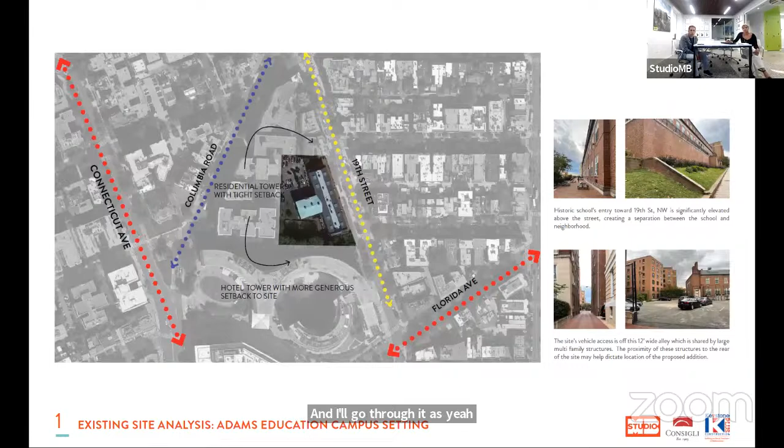Let me start on this part, and then Markeisha and I'll go through it. As I mentioned in our last conversation, you're all well aware of how dense the neighborhood is at the Adams campus. It is a very small, very dense urban site.

It's bounded mainly by the triangle defined by 19th Street, Columbia Road, and the Hilton to the south. Our site fronts 19th Street and butts up against the Wyoming on the backside of the alley. There's a very thin alley access between those two buildings that's on paper a 12-foot alley, but in fact only 11 feet, because there's a light pole actually installed in the paving there.

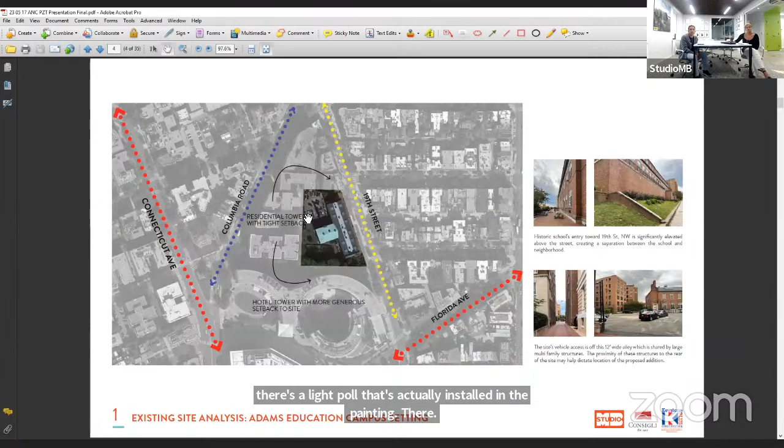So it's an 11-foot alley to get to the rear of the school, and there are some interesting topographic challenges we'll talk about. There's a lot of traffic on Florida Avenue and Connecticut Avenue, a lot of traffic on Columbia Road, and 19th Street certainly sees peaks throughout the day. We're doing a traffic study that'll be part of the team's effort going forward—they're actually out there counting cars next week.

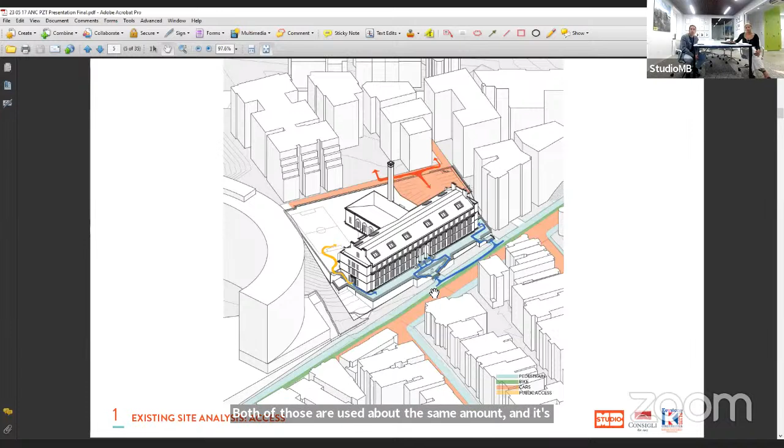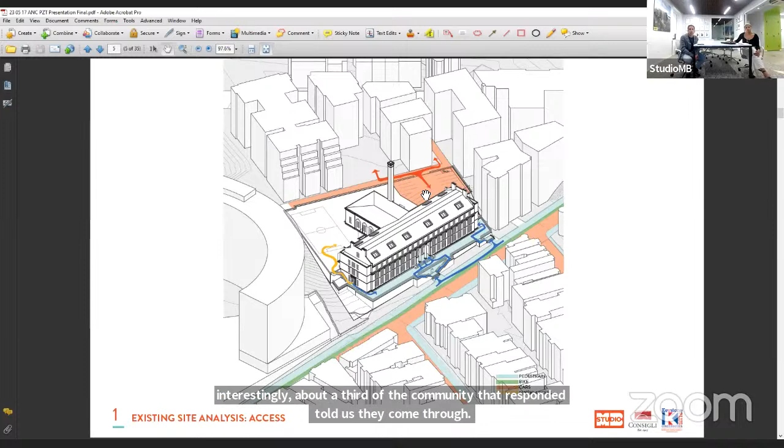This is a slide we've developed showing access to the site. One thing we learned from the school improvement feedback sessions was that the two front steps, which are part of the accessibility issue we'll be grappling with, are used about the same amount—about a third each by the community coming and going from the school. Interestingly, about a third of the community that responded told us they come through the alley, where that red arrow is. That alley, as mentioned, is quite narrow, and is also used for access to parking for the apartment buildings back there.

Our neighbors to the north and west abut us on that alley—on the west, and then right up against our property on the north. Then there's the yellow arrow showing access to the soccer field and playgrounds used by the neighborhood during the hours the fences are open there. So that's the public access to the rear of the site currently.

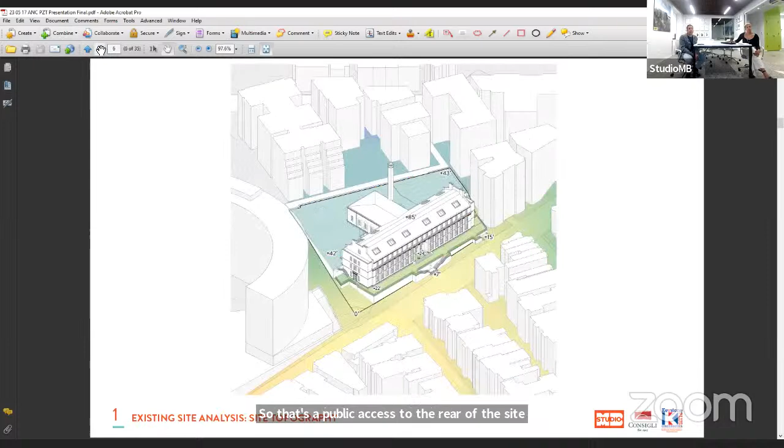This is a very interesting slide I like to point out—this is basically an 8-story building. If you take the corner of our lot at its lowest point, at zero, and go to that back alley, that's a 43-foot elevation change. The building itself, from our low point of the site to the terrace in front of it, is about a 22-foot wall at that corner, rising up to about a 7-foot wall at the north corner of the line. And the building itself is 85 feet above our low spot.

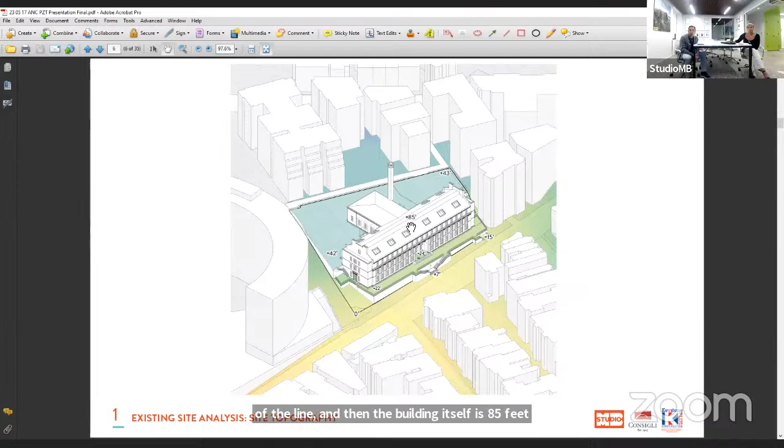So we are dealing with a very vertical condition, of which the school is not proposing to go any taller. The Historic Preservation Office would love for us to keep our addition below the ridge of the 85 feet. We think that's important to do as well, and all of our schemes have considered that.

This is a slide showing the adjacent heights. As I mentioned, our school is about a 4-story building in terms of occupancy above that terrace, but in height it's about 8 stories from the street. We're surrounded by some very tall buildings, and then the single family and row house neighborhood of 3- and 4-story structures in the Kalorama district to the right of us on the map, on the east side of 19th Street.

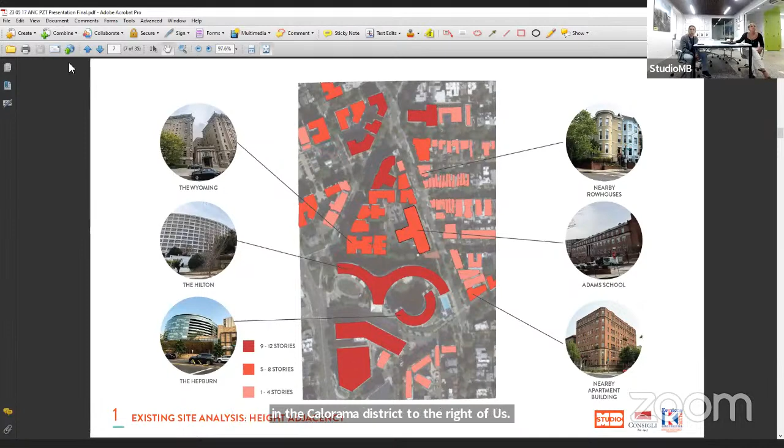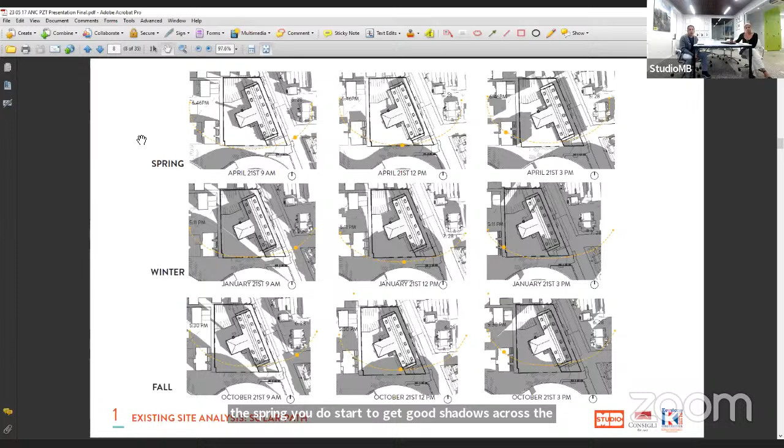Just a couple of things about what we've learned about the site. We have the veranda, which is 22 feet tall at its tallest corner, and in front of that are 4 donor trees, 2 of which are full grown and 2 are actually quite small, because urban forestry let us know that they had actually taken out 2 trees at one point, and then were contacted by the young woman's father, who reached out to let them know that these donor trees were done in her name, and so they've replanted 2 donor trees. So there are 2 young donor trees and 2 mature cherry trees there that we're trying to avoid.

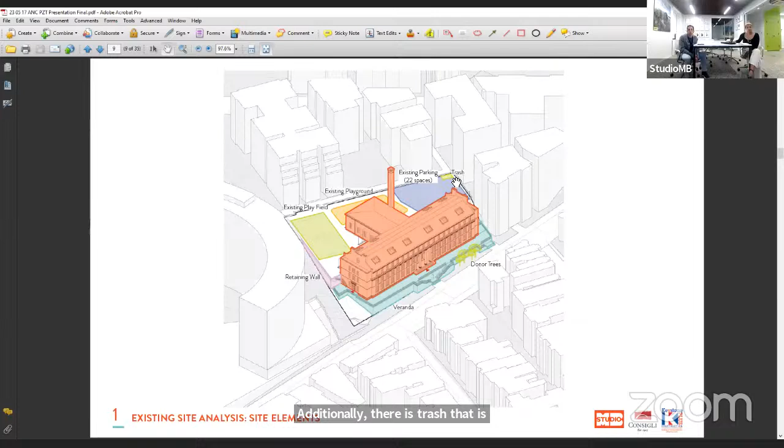Additionally, there is trash that is accessed off of the alley. The site doesn't currently have loading and unloading berth as required by zoning, but there is a trash area there, and an existing parking lot, which is striped for 22 spaces. And then the existing playground and playfield, which I'll show in a different view, are publicly accessible.

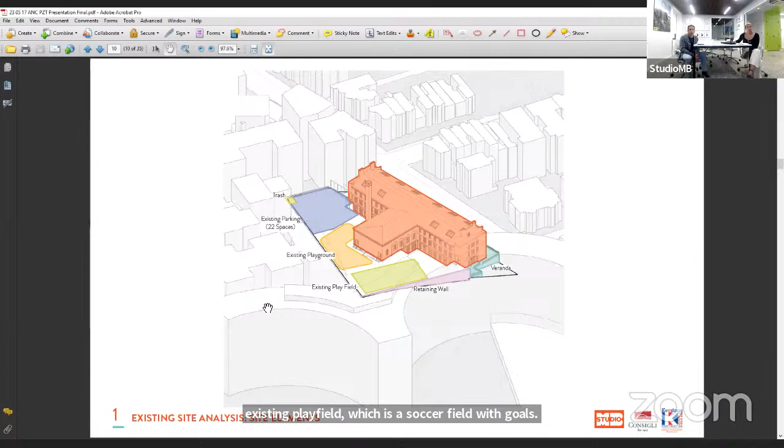And then from the rear, you can kind of see this same slide. The existing playfield, which is a fenced turf soccer field with goals, the existing play yards, which include a basketball hoop and some climbing equipment, and then the existing parking lot and small trash area that is off of that alley.

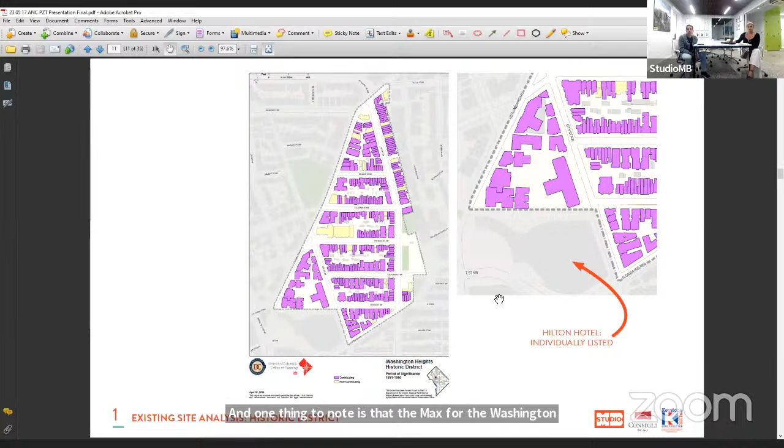And then finally, again, we are a contributing structure within the Washington Heights Historic District. That means we are looking for your support to treat this historic property with as much sensitivity as we think it deserves. One thing to note is that the maps for the Washington Heights Historic District do not include the Hilton, but that is in fact individually listed and does fall within the boundaries. So we are surrounded on all sides by contributing structures, and in fact are contributing ourselves.

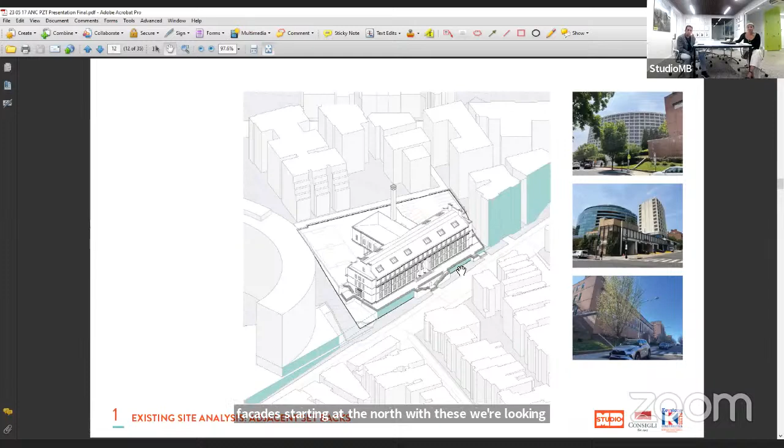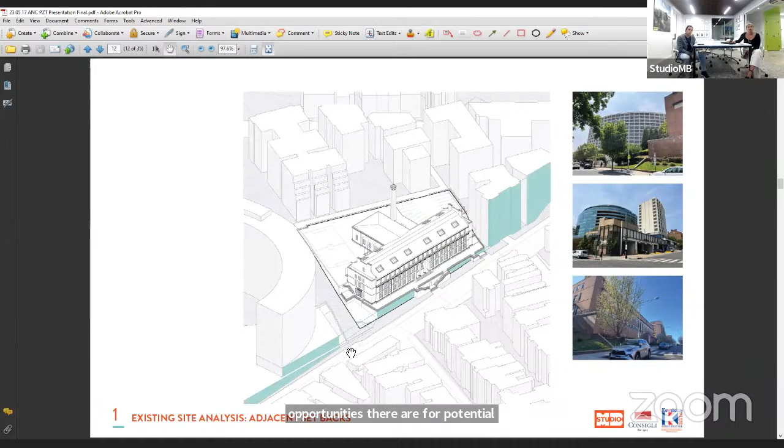It's worth noting that that wall, which is our property line, is punctured by those stairs that Dave was mentioning earlier. And then that wall continues, seemingly to align with, at least how you would perceive it, the plinth of the Washington Hilton. What you can see here, hopefully, are dashed lines that start to talk about gaps within that horizontal and vertical plane that happens along 19th Street. So here we were just starting to analyze what opportunities there are for potential addition within this context of this very strong plane along 19th Street.

And then our primary facade is set back from our veranda wall by about 20 feet. It's interesting to see what that creates. We start to think about the bookends that are created, right? So we have our facades pushed back, we have our veranda, and these tall buildings then turn towards us, creating these bookends that we're starting to think about how we should respond to, and what that space really feels like when you're standing on this veranda.

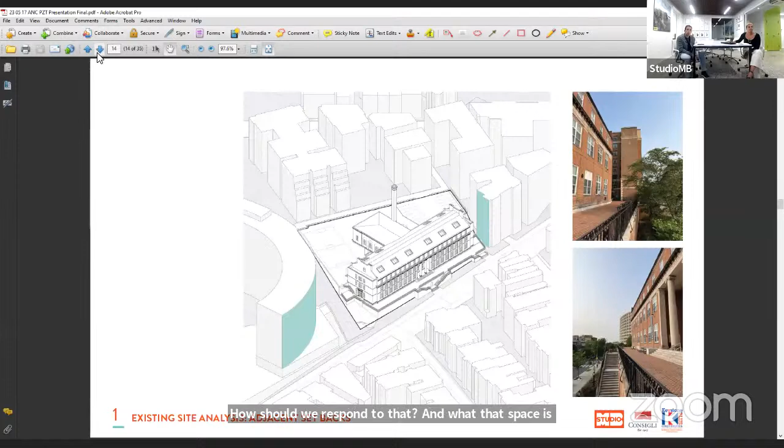The other thing that's really strong and worthwhile to explore is the horizontal plane created from that veranda, and how that aligns with the plinth of the Hilton. It starts to make us scratch our heads and think about what happens in this trapezoidal zone that we currently have, which is sloping up.

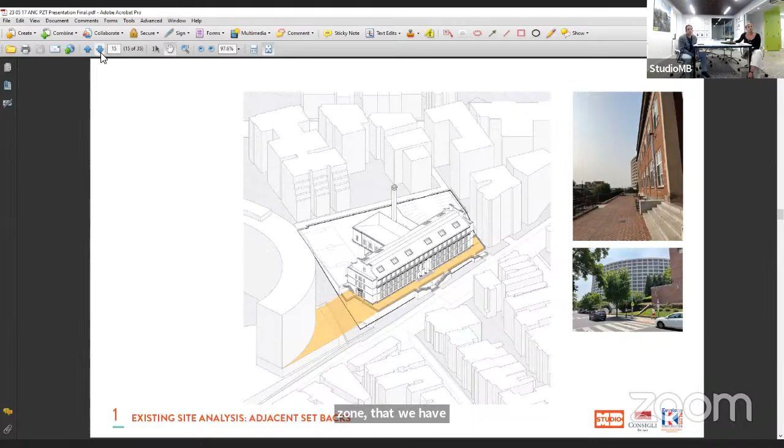And then we pull all those together to really hit home on the monumental scale of our school, as well as how we're framed by the Washington Hilton and the multifamily projects to the north, and what our response would be vertically as well as in the horizontality of the veranda. Again, really honing in on what's happening in this gap between the horizontal and the vertical continuation.

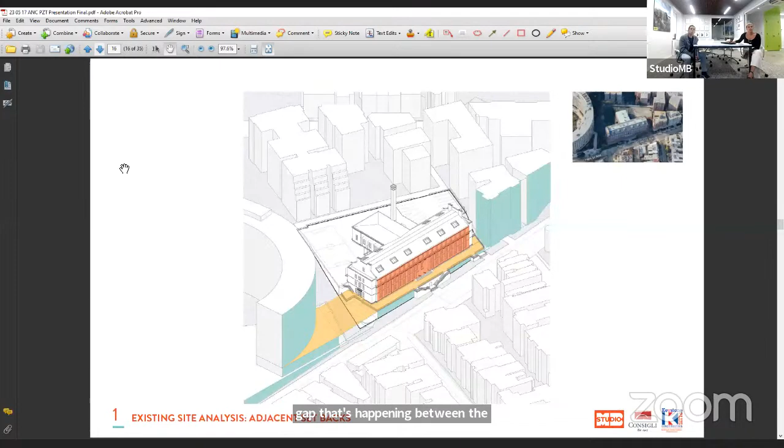So just a couple of context photos. It's important to note some of the conversations we've been having in our dialogue with the Commission of Fine Arts staff and the Historic Preservation Office. Obviously, this is a very majestic building that sits back from the street, which they are very sensitive to. I will tell you it is in very intact condition on the inside, and very much so on the outside.

We do not want to modify that facade. We want to clean it up, repoint it, and make it beautiful and look new again, but we aren't proposing anything significant on the facade towards the street.

They are very keen on the view that you see in the big image to the right, the view up as you're walking up 19th Street. We've shown that to them, and they agree with us that the plane of the veranda, the plane of the front property line, and the plane of the wall behind the veranda are things for us to play off of, which I'll show you here in just a few moments.

Of course, at the rear of the site, we're going to talk about the parking. We're going to talk about the community's concern on the ability to have outdoor play space, which you see in the top right and top middle, and we'll get to that in just a second.

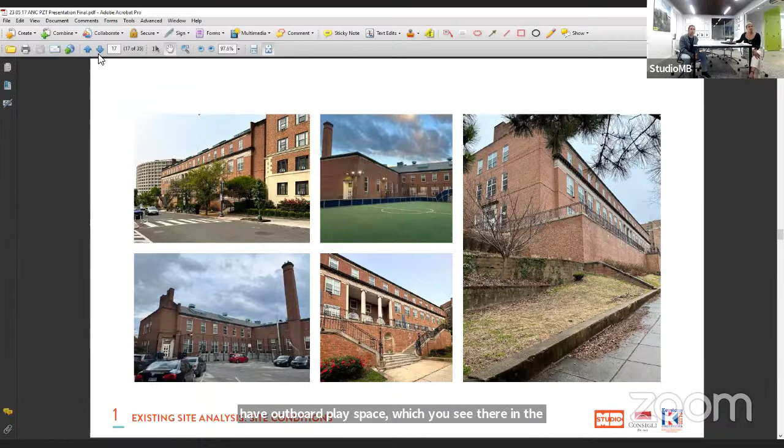This is a photo of 19th Street, the west side, particularly the loading that happens when the street widens by the Hilton. There are, I think, 6 different loading capacity pieces along that facade of the Hilton. There's a lot of trucks backing up and into that portion of the site. And then, of course, the 8-story buildings to the north of us that you see there, with some blank walls and a stair from the Hilton on the bottom right.

This is on the opposite side of the street from us. There's some weird thing happening with our feed there—I hope you can hear us. This is across the street.

These are the Kalorama, kind of lower-scale buildings directly across the street from the school—predominantly 4-story structures. There's this magnificent one which used to be the Chinese Embassy, the top right photo you see there, with interesting bays and two-tone limestone and brick components. Then you get to the 4-story apartment buildings that folks are familiar with there.

And then, of course, once you turn down the 2 side streets, the scale starts to change. There are row houses, 3- and 4-story, and a few pristine mansions, like you see on the bottom left, that have been converted.

And then lastly, along Florida Avenue and Columbia Road, these are very busy roads with very high buildings that define the kind of triangle within which we're set.

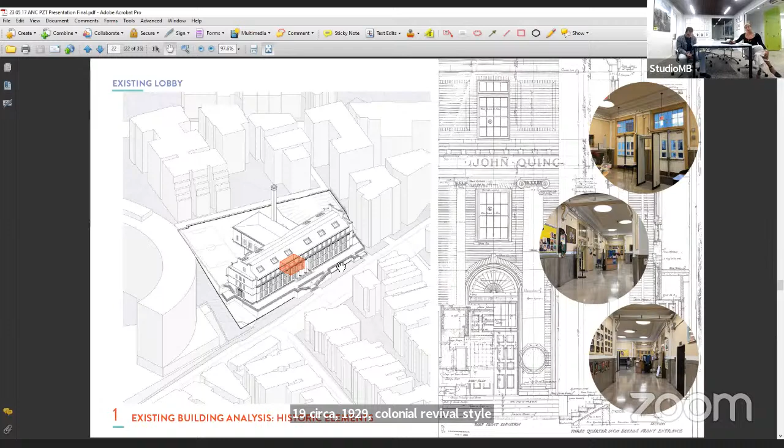So here, you've heard us talk about this circa 1929 colonial revival style building and how it is in really good shape, actually. And so we have engaged with HPO and CFA early to talk about which spaces on the interiors we should be mindful of, careful of, and restore, all within the scope of trying to deliver a modernized educational facility.

Starting with the first area we've identified as precious and to be preserved is the lobby. In the pictures here, you can see there's quite a bit of existing molding, and there's wainscoting along the walls. We'll be working closely with our partners at Consigli and DGS, as well as our historic consultant and CFA and HPO.

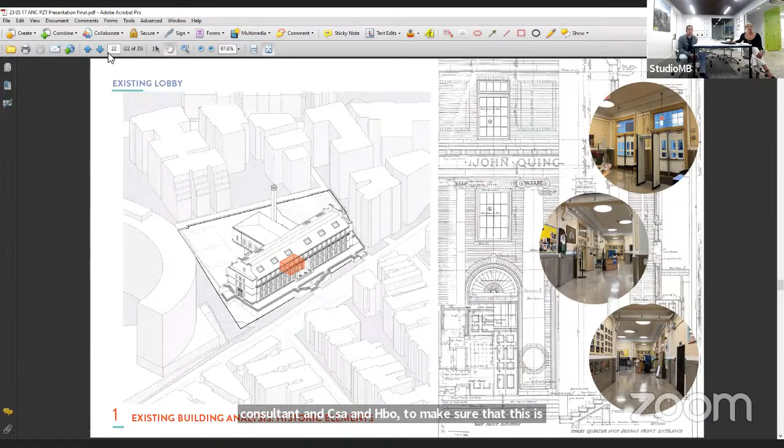There's the corridors. The corridors have terrazzo flooring, as well as these intermediate partitions that have the transom and side lights, which we'll also be preserving. We'll be working on the final doors, but in terms of this portal that leads you along this way, we'll be working on maintaining that. There are some elements you may be familiar with - the wall tile will probably be removed, but the priority would be to maintain the terrazzo floor and these original partitions.

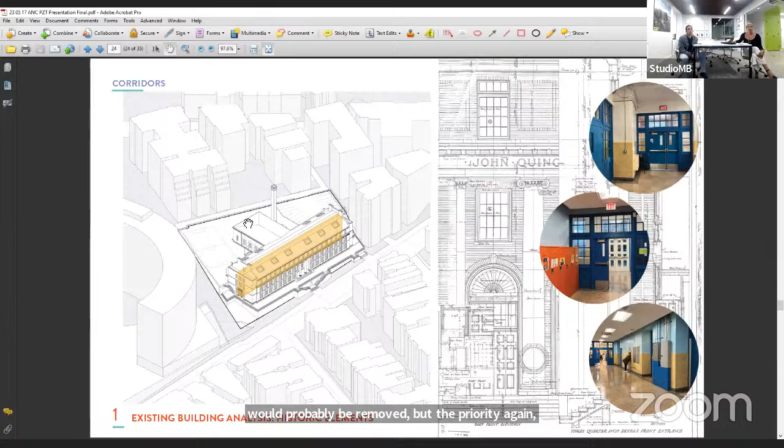And then lastly, there are some covered skylights that originally served as lay lights. These skylights provided light to level 3, which I think is quite awesome. We already have a generous amount of natural light, but in addition, they had these really cool skylights. We've identified these as opportunities for restoration, and in particular we're trying to preserve and restore two of these skylights to their original function as lay lights, as a sort of exhibit for the students to actually experience natural light coming in on the 3rd floor.

Here's a picture of it within the classroom. And then of course, sadly, that is covered with paper when you go up into the attic. But that'd be a priority of ours as we modernize the project. And those were identified on our site walk with the Historic Preservation Office.

This is a very important structure to them, and it's unlike some of the other schools we've worked on in the district. They feel very strongly about the preservation of this one, and quite frankly we've worked on schools where we might have disagreed about that interpretation, but this is really a magnificent structure, and their interests align with ours, and I think the school community's interested too. Adams Morgan is named after the Adams School - it's a really important feature of the neighborhood. It's a beautiful structure, we want to preserve that, and we are in alignment with Historic Preservation Office, and I think CFA's staff agrees it's a magnificent structure.

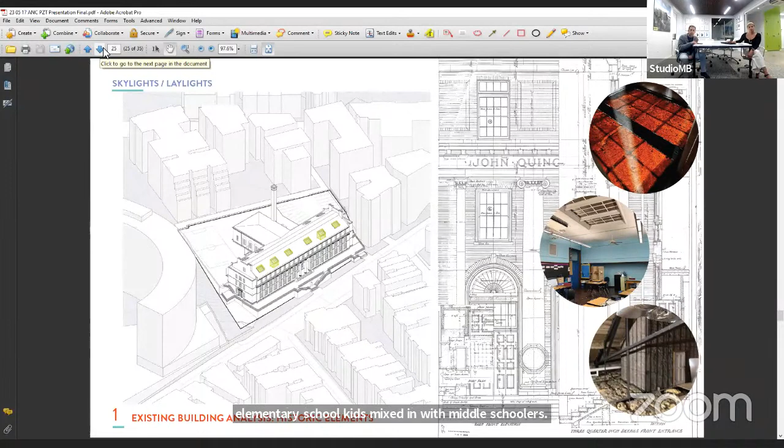So how do we think about adding pieces to this to get a modernized school that'll give the students here, who range from 4th through 8th grade... it's important to understand these are elementary school kids mixed in with middle schoolers. If you have kids - and I've had kids that were 6th grade daughters mixing with 8th grade boys - that's something I was sensitive to. In this campus, you've got 4th and 5th graders mixing with 6th, 7th, and 8th graders. So it's a challenge to have those all operationally together, and to try to do that with a modernized school in this footprint is what we're going to talk about next.

So let's go to the next slide. We've kind of defined what are some of the major exterior considerations that we have to take into account.

First of all, there's no getting around the density of this urban site and how little space exists on this lot, and how wonderful the community absorbs all of this. When you walk by this school, which we do often since our office is only 4 blocks south, there are kids on the terrace and you know it's a school if you pay attention walking by. They're elevated, but you hear laughter throughout the day and playfulness after school, kids stretching from the running club or basketball team because the gym is so small, stuffed into that auditorium. It is a dense urban site.

We have a lot of things we want to accomplish on this site, and the priority is to provide an equitable set of facilities, indoor and out, compared to what the rest of the district students are getting. That's the challenge of the dense urban site. The other thing we've pointed out to the Historic Preservation Office is there is no equitable, accessible entry. We can't just have the accessible entry come through the basement because then it's not equitable. We need to create an entry accessible off of 19th Street that allows equitable access to students who may not be able to do the stairs, and parents as well.

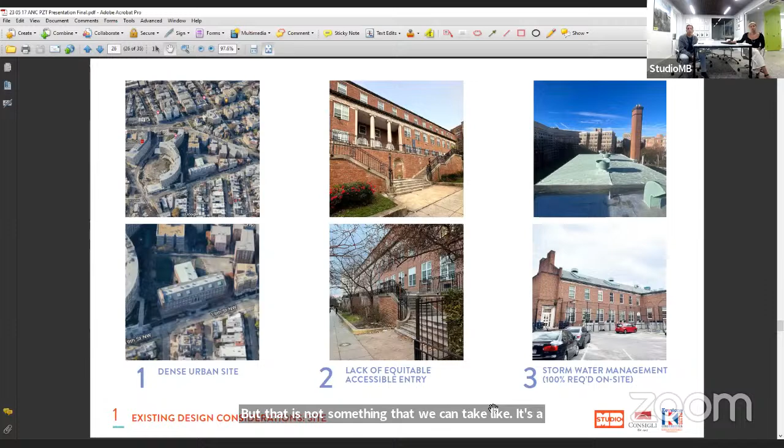Finally, there's a significant requirement from DOE to treat 100% of the stormwater on site with green roofs and other things, contributing to our pursuit of LEED for Schools on this project. But that's not something we can take lightly - it's a very dense urban site that we have to retain stormwater on. So that means we're going to have green roofs on the new portions, and we'll need rain gardens throughout the site to pick up runoff.

Next slide. Then when you get to the interior of the school, how do we take this large building and use the footprint of what we have to maximize the square footage that isn't being used? What you're seeing in these images is Markeisha walking through the attic, under the 85-foot mark. If you walk in at 0, she's 85 feet up - well, she's 70 feet in the air, it's 85 to the ridge. So she's up in the attic. There's opportunity there, we all agree, to open up the rear to get classrooms into this space with plenty of height.

There's likewise under the veranda - very dark, but excavated space - that the Historic Preservation Office would like us to utilize to whatever degree we're able. However, they do not want us to penetrate that wall with windows. And then there's a large mechanical room that we're putting some classrooms into, particularly music classrooms, to take advantage of the height. And then there's using any kind of shaft space along the corridor walls that we can to enlarge the classrooms to modern standards. These classrooms are almost big enough for current classrooms, so we're able to use them as currently laid out in a lot of places if we take away the shaft space behind those walls.

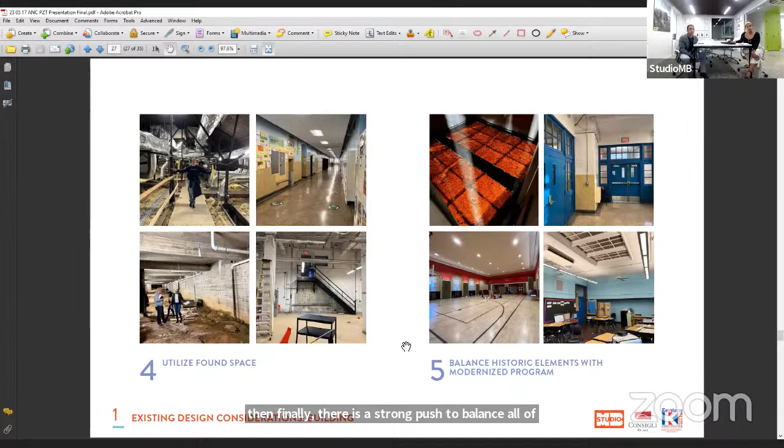And finally, there's a strong push to balance all of these historic elements inside and outside with a modernized program of education specifications. Next - so the design concept. Let me walk you through some of the steps, and then I'll show the site plan so we can talk and pause there for questions. I know those are already coming, but let me go through the design concept, which is 4 or 5 slides here. Can you click forward?

So you're 70 feet above the entry. This is a very vertical building, and that is a very vertical school. I don't think anybody would design a 7-story school if they didn't have to, and so we kind of have to.

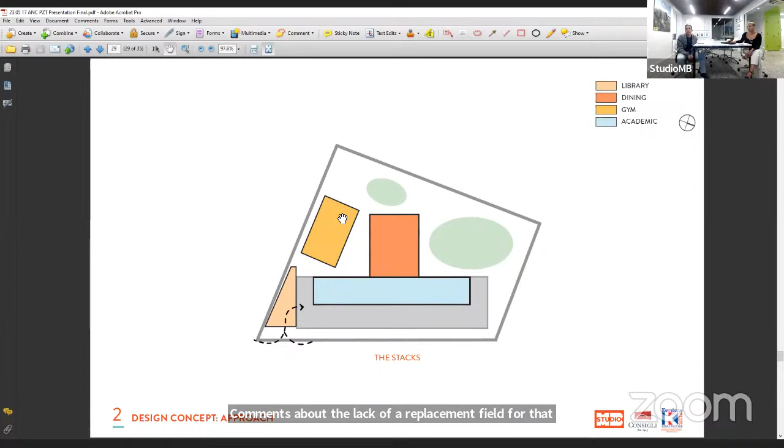So we have a 7-story building here, and part of that is a modernized program that includes a gym. The gym is tucked into the corner of the site, located where that existing soccer field is. We've gotten a lot of feedback from the SIT, with very concerned comments about the lack of a replacement field. Whether that soccer field were to stay there or we put the gym somewhere else on the site, there is a loss of footprint in order to accommodate this modernized program.

We call this the stacks, because with that entry you see on the left, we're trying to put as much program over there so that the addition doesn't grow. We've talked with the school about whether the library wants to be up in the attic or in a more equitable position in the addition on the left.

The librarian was very adamant that he did not want the library to be an afterthought in the attic. He liked the current library, which is only 900 square feet, and the new library will be 3,600 square feet, to give you a sense of the difference between what they have and what we're offering. He wanted it to be very close to the entry.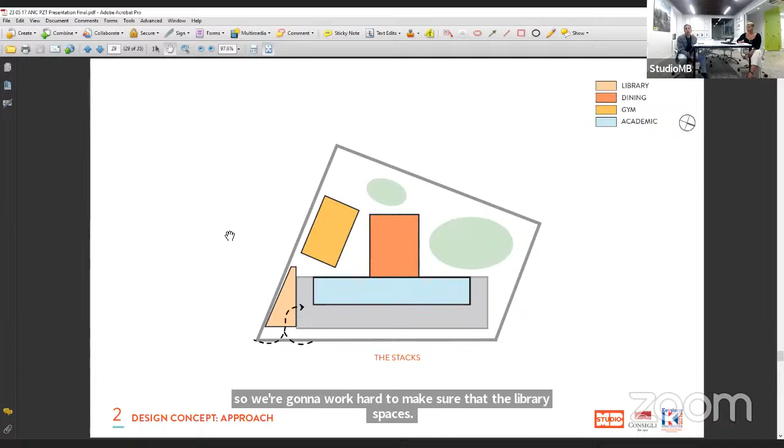We're going to work hard to make sure the library spaces, as has been done elsewhere in DCPS, work with the flow of students that come through there. That's something that will continue to be developed, but the school has chosen the library to be in this portion of the site.

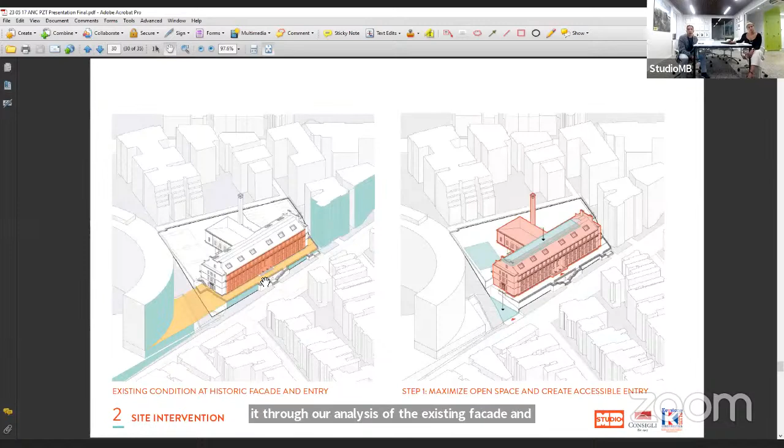Next. So very quickly, Markeisha walked you through our analysis of the existing facade and entry veranda you see on the left. I've talked about where we're locating our addition spaces, because we're trying to maximize open space on the rear of the site. We need to provide an equitable, accessible entry at the lowest point of this.

So we're proposing, in that trapezoid shape Markeisha referred to, an entry pavilion, and then a piece above that containing the library. On the roof of the existing building, we're maximizing the rear of the attic and putting classrooms facing out the back. Under those skylights Markeisha mentioned, we're putting rooms that will be lit through those reopened skylights—two of those will remain as lay lights down to the 3rd floor classrooms.

We're taking advantage of that. And then of course the gym, in its scale and location, is starting to relate to the scale and size of the auditorium, which is the cafeteria-auditorium in our proposed renovation.

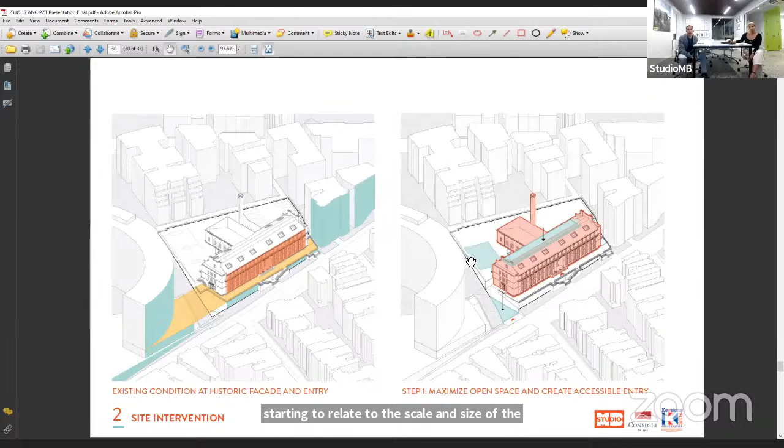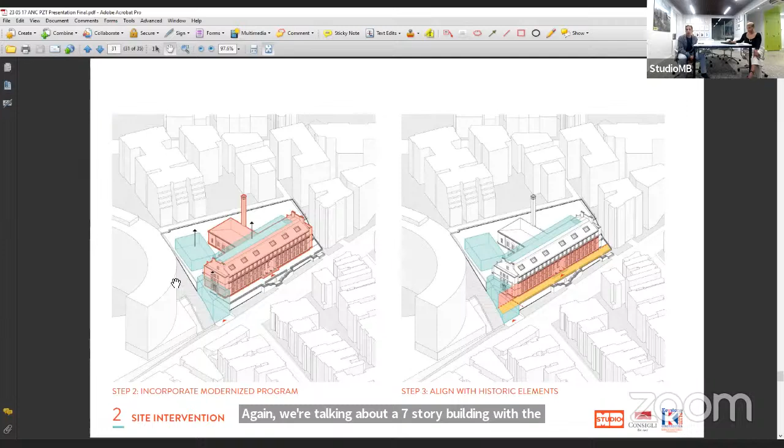Next slide. With that understanding, we extrude up all of the program on the left-hand slide in step 2, so that we maximize all those heights we can. Again, we're talking about a 7-story building with the attic. We create as tall a pavilion as the Historic Preservation Office feels we're able to along that sensitive street edge, and then have the gym in the rear.

Then we started to think about how we take that pavilion and align it with the historic elements of the veranda, shown there in yellow, and the red of that historic facade. Our last step is to create a welcoming and open library, because the joy of walking by this building in the middle of the day is the kids on the veranda. I really enjoy that—our office is right south of here.

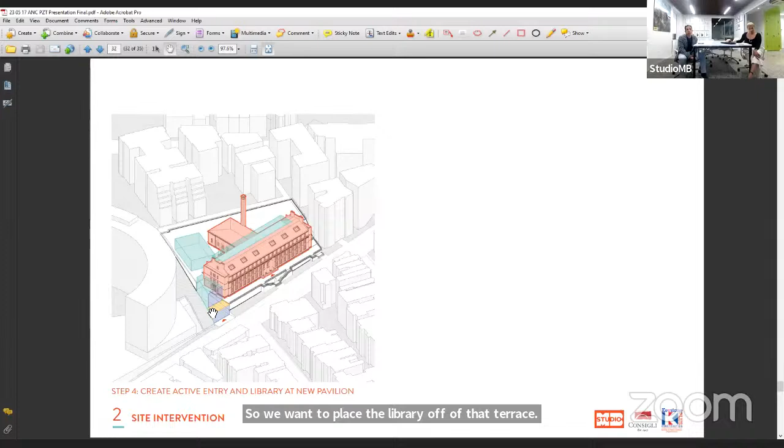So we want to place the library off of that terrace. There's a reading terrace off of the library, which is the yellow you see there, and then the entry pavilion, which would be the main entrance. This will continue to be developed.

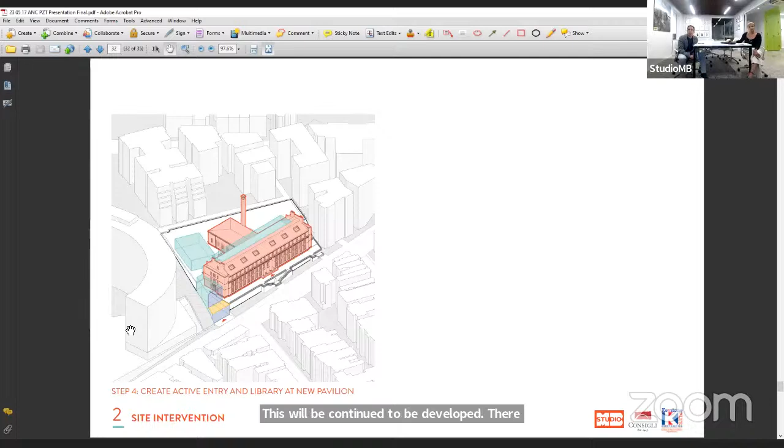So with that said, I know there's some questions in the chat, and I'm going to ask Oni to... that's as far as we got.

We were going to come with a little bit more development on the pavilion. We did have a conversation with HPO and CFA, and they asked us to look at a couple of things which we're in the midst of doing. So we want to come back to you all and talk a little bit about that eventually. I have a slide that shows our proposed materials, but I do want to stop and start to address some questions, and I'll let Oni decide whether she wants to take a question or push it towards me. But Chairman Dixon, I'll let you step back in.

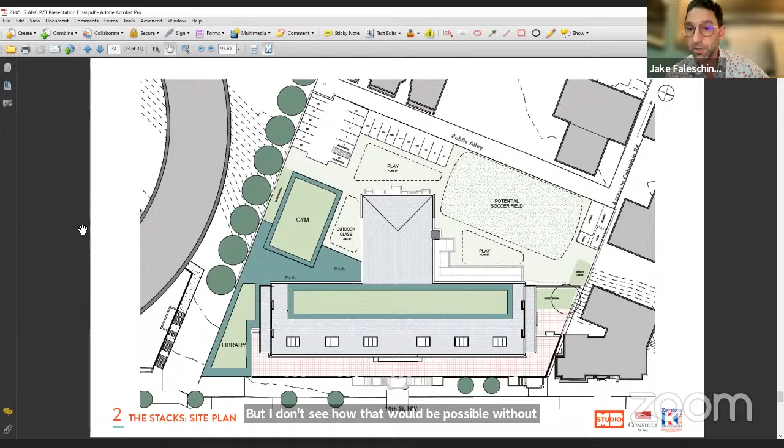I'm going to let Oni take that because it's really about enrollment and capacity, which is increasing. So I think David summarized that very nicely. When we're talking about the modernization program, we're building to future growth for the school, following the 10-year projections set by the district through the Master Facilities Plan, set by the Office of the Deputy Mayor of Education.

So the number we're tracking, one second, I do have it up. The design capacity is actually 542, for a specific program that's here now. It's actually an increase of students because we're currently sitting at about 375 students in the building. So we are thinking of future growth for the building.

I can't speak totally to how the DME creates their projections, but I do know it includes feeder growth, looking at what's happening at Oyster, but also what's happening in the neighborhood. I also know the DME is hosting and starting their boundary study, so this might be a great conversation to partner on. I can help you connect with them for any open town halls or conversations to make sure we're having equal representation, since that's a concern from this community.

If I could just add, on the specificity of increasing the size, Commissioner Faleschini, we're going from 31,000 square feet of net programmed area to 56,000 square feet. That's an increase of 25,000, almost doubling but not quite. I think we're doing as much as we can to minimize impact on the lot, but we are almost doubling the scale of the programs offered.

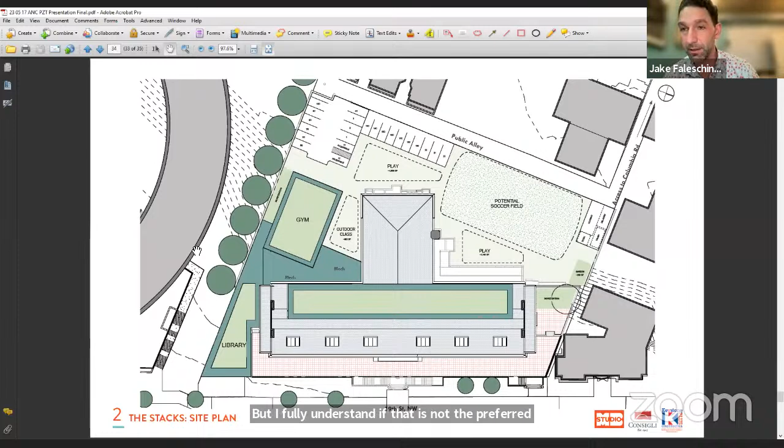That makes sense. I meant where the existing parking is on that design we're looking at, like the upper left-hand corner—not to take away from any student facility space, but to just double up the size of where that lot is. But I fully understand if that's not the preferred method, and would also add such a cost burden to the site that it would make it unfeasible within the current cost structure. Thank you, thank you all.

Are there any more questions from commissioners? If not, we will open it up to the public for questions. Going once, going twice. Oh, Commissioner Horowitz.

Yeah, hi, this is Daniel. I represent the single member district that the school is in, and I do want to leave most of the time for public comments, I think there will be a lot. I just want to echo all those comments I'm seeing in the chat, and I hope those folks will get on video or join the panel and ask those questions directly. But is there a possibility of getting parking from the neighboring underground garage at the Hilton?

At the Hilton, I'm not sure. Dave, do you have a response?

Yeah, so this came up at the SIT. I think it's a really admirable parent community out there. My kids are in DCPS, and I come from a similar setting where parents are quite good advocates for the school. There was discussion about whether the PTA could rent an additional 11, 12, 14 spaces at the Hilton. Those are available. That is an operational decision, as I understand it, that would come out of the operation budget for the school. It's not something the modernization would be linked to, so that is entirely possible. It's an operational question for the school, not something central office takes the burden of.

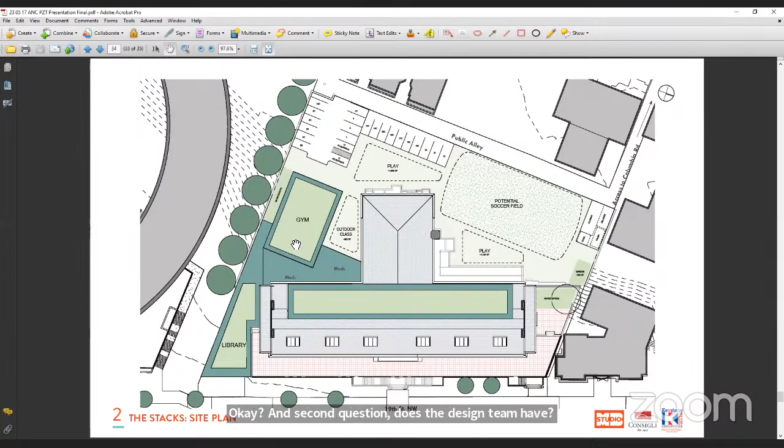Okay, second question: does the design team, are you considering any changes to the traffic flow outside, or pickup, or anything on 19th Street, understanding that it's already backed up during those hours? Is that something that's part of your plan, or is that going to be totally extraneous?

Oni, do you want to talk about your general relationship with DDOT, or do you want me to? I think we can dovetail it together.

When we go through modernization programs with the traffic study that Studio MB mentioned earlier, we'll have that part of the study so we can present it to DDOT and have a conversation that could possibly support or help implement changes to pickup and drop off. The conversation doesn't happen in a silo, but DCPS does support any changes specifically that come up because we know this is a lived experience for everyone in the neighborhood and for the school.

So pickup and drop off zones, as well as any implications we can possibly support through a traffic study, are all discussed and talked through with DDOT — like safe routes to school, making sure everything works appropriately for the school. Any final decisions, of course, are rolled out by DDOT. We present basically a package, and this happens on every project where we work with our agency partner.

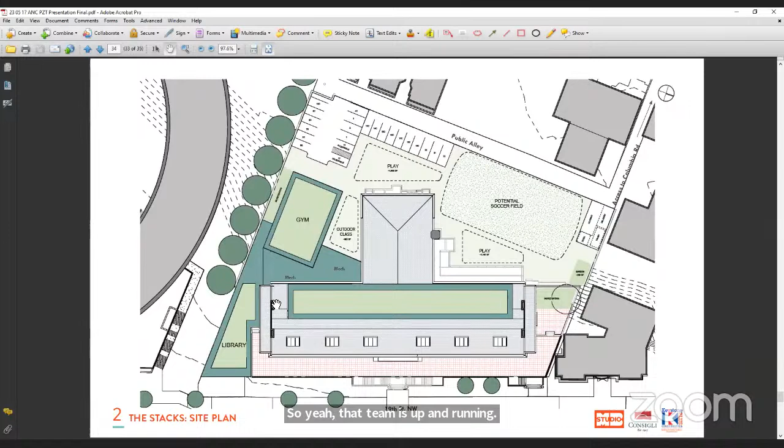I live in the neighborhood and my son is at Oyster, and I'll echo the request for FAQs and sharing drawings. I think we're all so excited and interested to see where this goes. Thanks so much. Thank you.

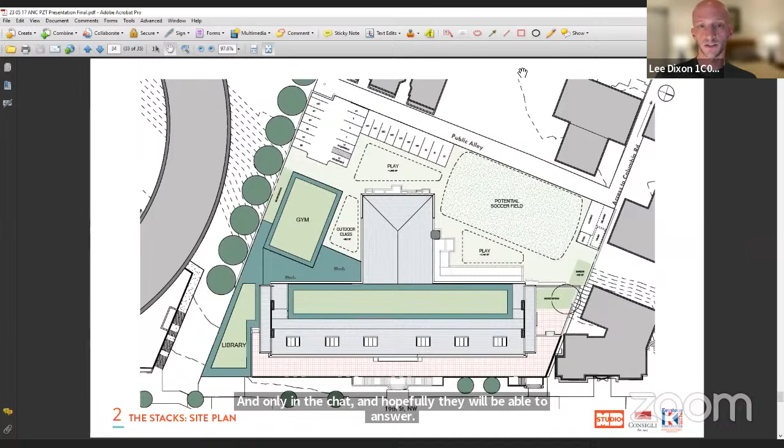Sure. Hi, everyone. This draft resolution came out of discussions that I had with the OCC following the most recent SIT and OCC feedback meetings. Generally, it goes through the background of the project and then reiterates the community's broad interest, both neighbors and the school community, in preserving the outdoor play space at the school.

I will acknowledge that the new plan we saw tonight feels like a major step forward towards that, although I think there will continue to be feedback. But I still think the resolution is relevant, and this is just the beginning of this process. That was the major piece of feedback that came out of the first meetings, because it was seen by many as such a glaring deficiency of the plans that were presented.

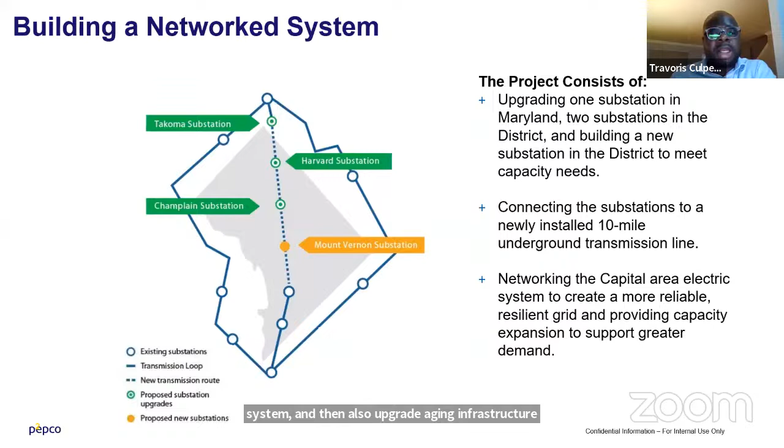I know a lot of you might have seen some of the construction work taking place on V Street and along 16th Street. This project calls for us to build a 10-mile transmission line through the city to upgrade our infrastructure. Also part of this project calls for us upgrading 2 substations, which Champlain substation is a part of. The purpose of this project is to increase the capacity of the system, network the system, and upgrade aging infrastructure. When we're upgrading Champlain substation, we will not only be upgrading aging infrastructure, but also increasing the capacity of the facility.

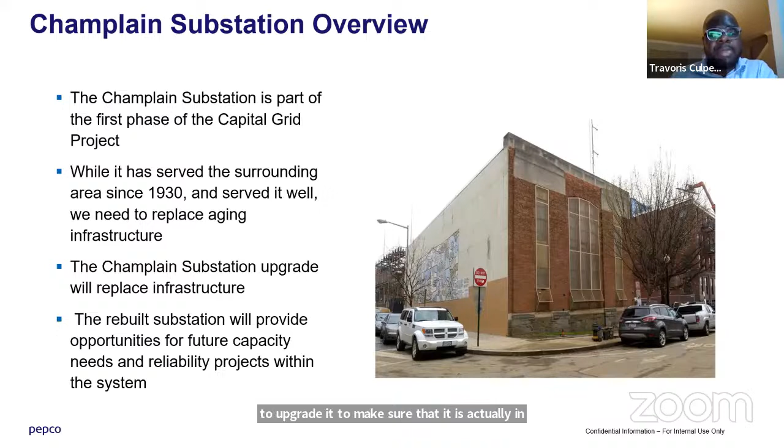As many of you may know, who've lived in the area for a long time, this substation has been here since 1930. It served the community well, but we will need to upgrade it to make sure it is actually supporting the reliability in the area.

Although we have not had any construction on the substation, and you've seen construction in the street with the transmission line, there has been some activity as far as approvals for getting the project started. As many of you may know, the substation was nominated as a historic landmark in February of 2018.

We actually went to the BZA and received approval for our special exception request in February of 2018. The project was approved by the Public Service Commission in 2019, and we most recently submitted our conceptual plans to HPO for review last month.

We anticipate the substation to be in construction starting somewhere in 2025 and then concluding construction in 2028.

The mural that is currently on the substation, on this side of the building that has the mural, will be demolished. And of course, we'll work with the community to come up with a new painting that represents the community.

And with that, I will turn it over to Mr. Craig Wright, who is with McKissack & McKissack. He is one of the senior project architects, and he's going to walk you through our conceptual plans and what we hope to do with the substation.

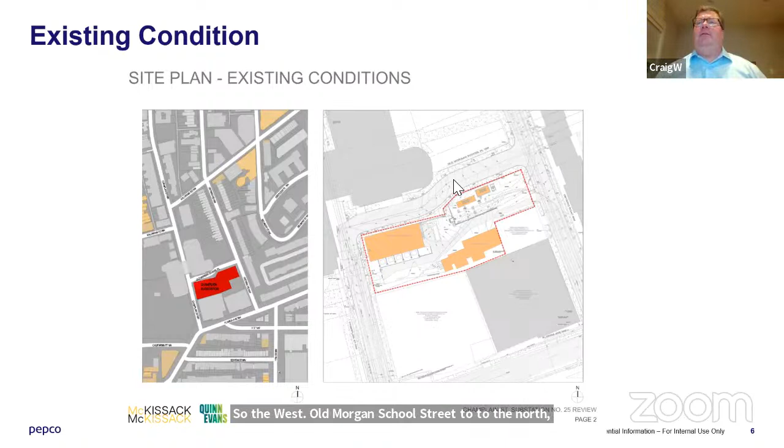So this is a site plan of the project. The substation is the largest orange box on the screen, and it's bounded by Champlain to the west, Old Morgan School Street to the north, and Ontario Road to the east. The other orange boxes on the screen - if you've driven around this site, you'll see a lot of electrical equipment that's being hung off of steel structures. That's what the other orange boxes represent. These aren't really full buildings per se, but they are those large electrical structures that are housing equipment.

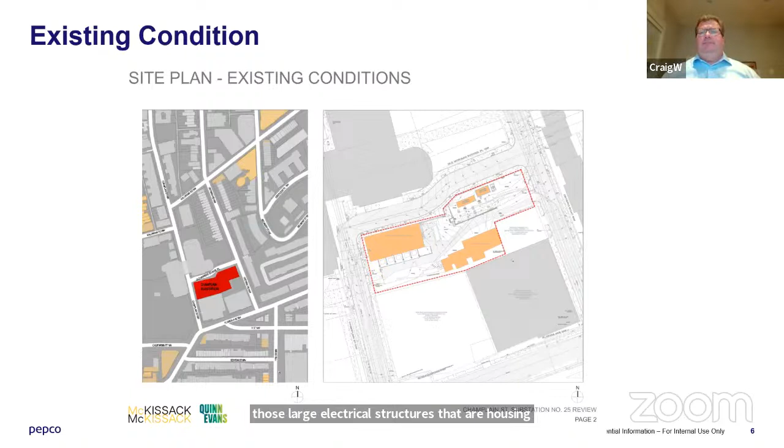If you go to the next slide, DeForest. Okay, I also want to mention that right now the existing substation, the footprint of the existing building, is about 4,000 square feet. Just keep that in mind when we talk about the new building.

So here are two of the existing views. One that was already mentioned from Old Morgan School Place and Champlain. You see the mural on the existing side of the building that's there currently. And then the west facade on Champlain will be the major facade that gets saved and restored to a better condition than it is now.

And then the lower view is also from Old Morgan School Place. This is that electrical equipment towards the back of the site that's hung off of this steel structural system. This will also be improved through the course of the project as well. If you can go to the next slide, DeForest.

So these are some blow-ups of the existing conditions. This is the west facade facing Champlain Street, and this facade is actually the most interesting one, with the three bay windows we have here. Through the preservation of the building, the security grills will be taken off these windows, and the windows will be fully restored behind these security screens, as well as the masonry and stonework on this facade restored to pristine condition.

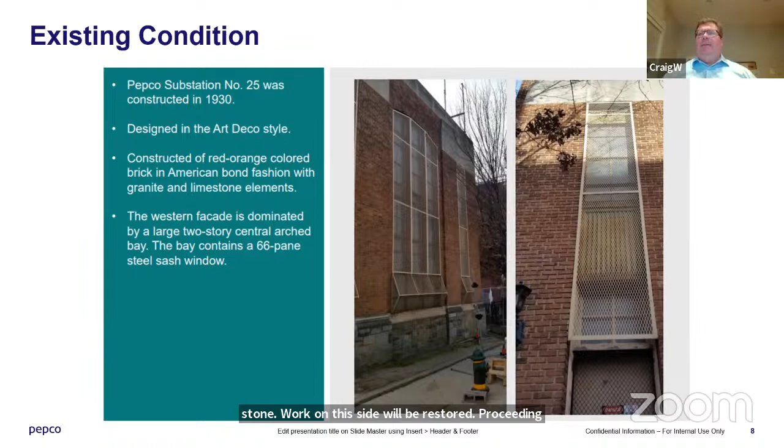The top picture here is the other interesting part of the building. Currently there are 6 buttresses on this side of the building, which previously had different types of equipment in between each buttress. We're looking to save some of those buttresses through the project, which I'll explain as we move on. Down below, we have that mural on this side of the building, and we're trying to create new places for new murals as the project moves forward.

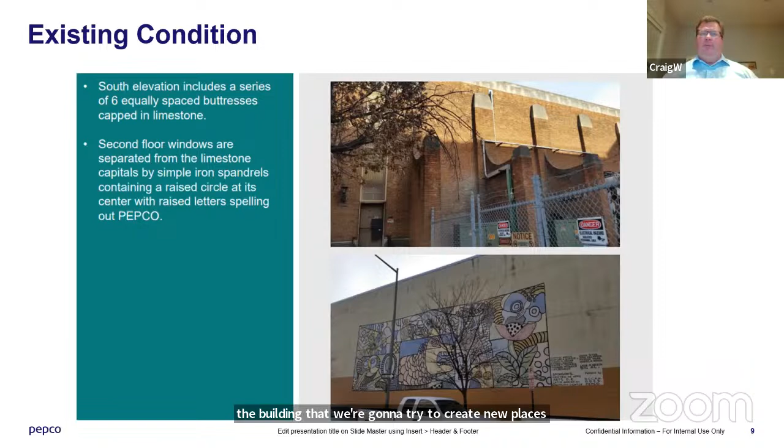So again, this is a view from Champlain and Old Morgan School Place. The area with the number 1 is the large area on the west facade that will be restored and preserved. This is the part that will be held up by structure during the demolition of the rest of the building so that this facade can be saved. The number 2 is the large portion of the substation that will be demolished during the course of the project.

Next slide. This is the view from Champlain Street. Again, the area outlined in red with the number 1 and 2 are the areas that will be saved and preserved during construction of the project, and the remaining parts of the substation will be demolished.

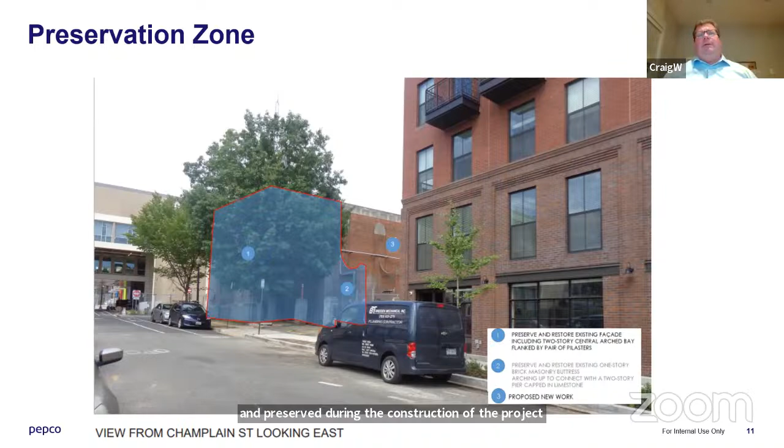Next slide. This is the view of the new project. You can see the west facade on Champlain has been restored and is in a slightly darker brick color, and the stone at the top and bottom of the facade will also be restored. The new substation along Old Morgan Street will be an improvement here because this side will now be a brick facade and not the plaster facade that is there now.

Between these pilasters are areas where we can create a wall surface for new murals, perhaps with more than one artist if you break this out to 4 or 5 different wall panels. Also on this side, we've been working with historic preservation to make sure the parapet and the base of the building continue around the corner on this elevation, so the end product will look like a unified building.

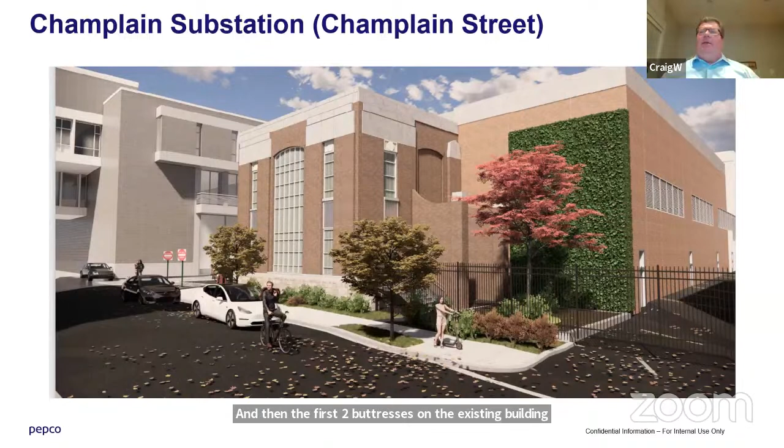Next slide. This is a side, again, from the west on Champlain Street. Again, we're saving that west facade, and the first 2 buttresses on the existing building are the ones we will save. The rest of the wall you see here will be from the new substation.

As with the previous project, we have GAR requirements for maintaining water runoff on the project, so we're using green walls as some of our ways to take care of that runoff. Here you see in front of the building a planting area on Champlain Street, and we're squeezing in as much planting as possible on the site to meet that water runoff calculation.

This is an overall axonometric of the entire substation when it's finished. The big thing to notice here is that all the equipment you see outside now will be contained within the building in the new project, so you won't be seeing the uglier electrical structure hanging from that steel network anymore. It'll all be housed within the building.

And Craig and Travoris, I just wanted to add, I'm Christine Shiker with the law firm of Holland and Knight, and I'm land use counsel. I wanted to make sure the committee understood what our application is pending for. We submitted to the Historic Preservation Review Board for the June 22nd meeting for a concept review of this substation design.

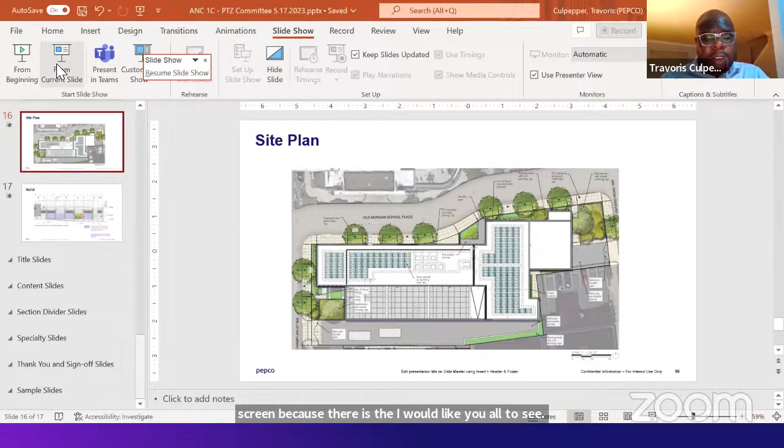We do have our environmental team, and let me share my screen because I would like you all to see. Here's the actual site plan, where there will be trees, shrubbery, both on the outside and the inside, and we will maintain everything within our property. I believe there will be tree boxes here as well, so these trees can be planted. And then this area here is still internal inside the gate, but it will be for our green area ratio and retention tank as well.

Okay, great. Thank you very much. If there are no more questions from commissioners, I see one hand up, Kristen Barden.

Hi, Kristen. Hi, Kristen. Hey, how are you? Nice to see you. How are you? Nice to see you as well. Good.

Maybe I missed this in one of the slides, but I was just curious when you think construction will begin and how long that will last.

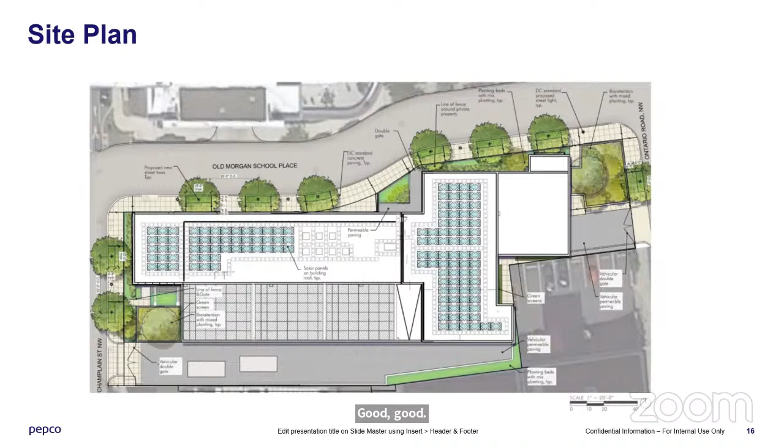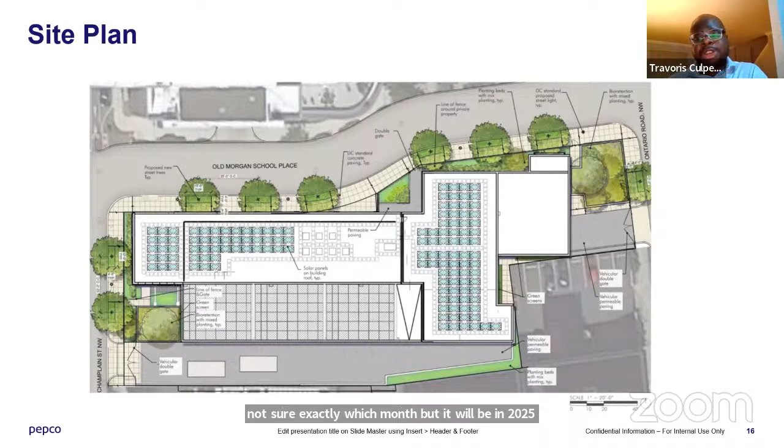We anticipate construction starting around 2025. Not sure exactly which month, but it will be in 2025, and it will last until 2028. There will be significant construction taking place. We don't have a contractor at this time, but I want to make sure to note that there might be a possibility we may have to close a road. Not sure when or where. We'll have to know more specifics around that once the contractor is onboarded.

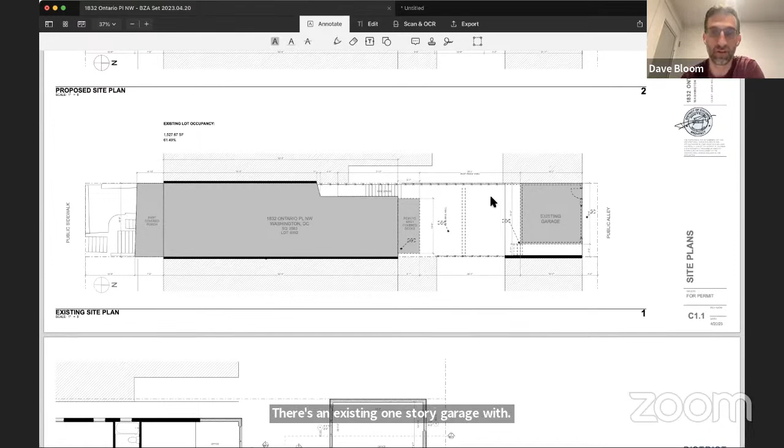So I'll first show you, this is the existing site plan. It's an existing row house. You can see the alley side is on the right side. There's an existing 1-story garage, which we are substantially removing. And then there's an existing set of double-high covered decks at the rear of the house that we are also removing. And I'll quickly show you some pictures.

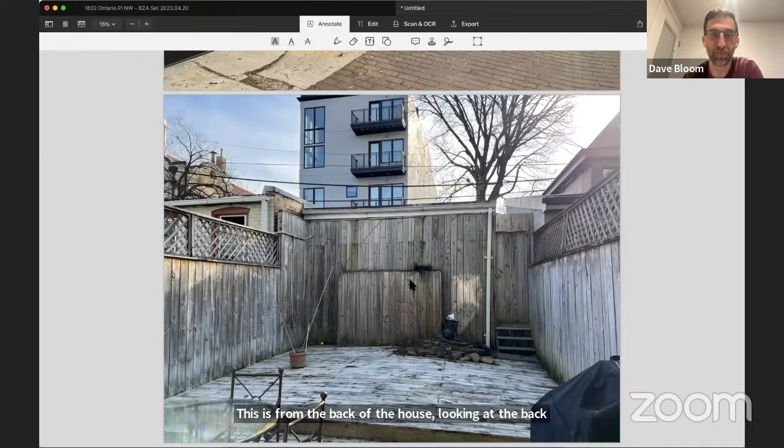We are proposing a 2-story garage, and there is a spiral staircase that gets you to the 2nd story of the garage.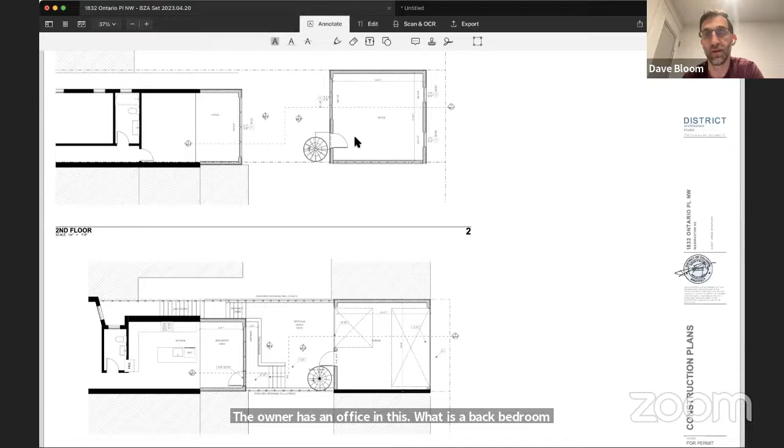This just shows you the floor plans. At the 1st floor, that additional space at the rear addition is for a breakfast area. We'll repave the rear yard of the house. And then this is the garage level. At the 2nd floor, the owner has an office in what is a back bedroom, that'll be expanded to a larger office, and then office space slash extra bedroom at the second level of the garage.

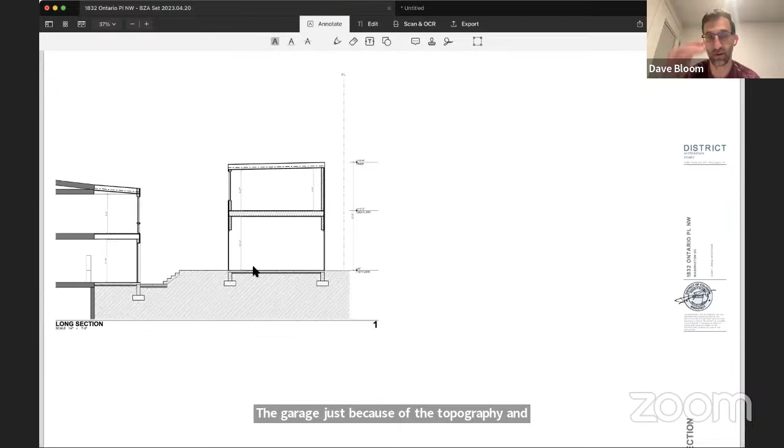This is just the roof plan. The section - the garage, just because of the topography and the height of the alley compared to the building, is maybe 3 feet higher than the building, sort of at the grade level. So that's why you see some stairs here. So from the first floor, you go up some stairs and then you're level with the garage and the alley.

And then this is what the elevations look like. So to the left here is the elevation at the house, rear addition. This is the garage in the middle, garage elevation, if you're looking at it from the alley. And then at the right, if you are looking at it from the house. And that is all the drawings we have.

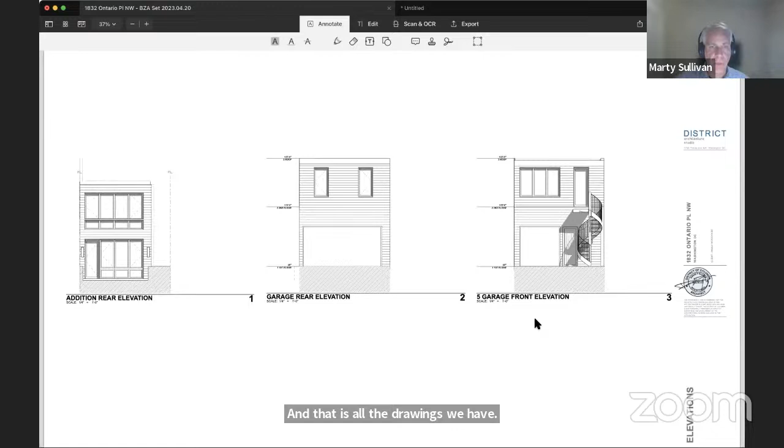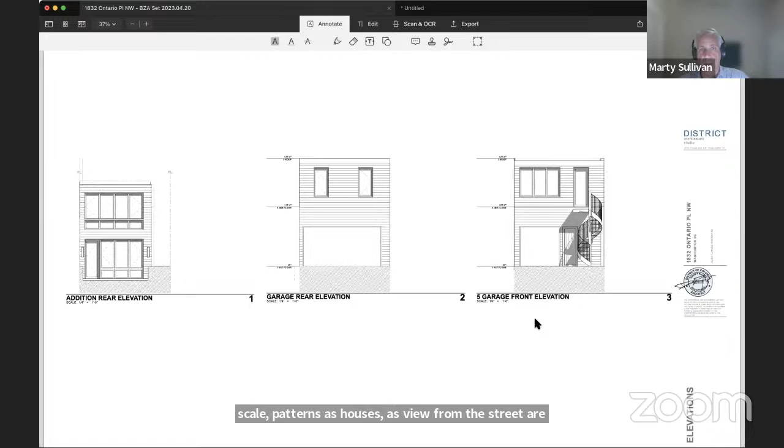And if the committee would like to hear, I could go into what the specific conditions are that the BZA is going to consider. For the addition, for the lot occupancy relief, and for the accessory building in a required rear yard relief, the specific conditions are the standard ones of not unduly impacting neighbors' light, air, or privacy, and not substantially visually intruding on character, scale, and pattern as houses are viewed from the street or the alley. And because we line up specifically with the 2 adjacent properties, we meet all those conditions.

And also an update on the neighbors - Mr. Woodyard couldn't be here tonight. He has spoken to both neighbors and said that they have no objections and they're in support, and he expects to get support letters from both neighbors, which I assume we'll have in time for the full meeting. And our hearing's not till September 13th, by the way.

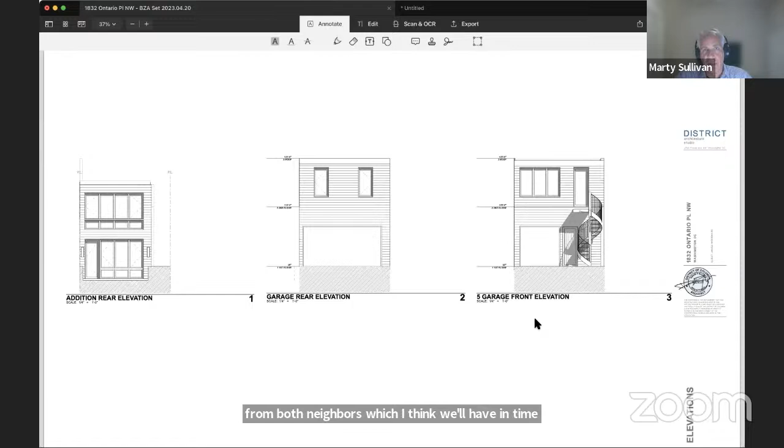So we've got time. Regarding the half foot of relief for the center alley line setback, that's a slightly different condition. We see a practical difficulty in providing the full-size driveway width or alley center line setback, and it's basically to be able to line up with the other garages. That's why we're asking for that half foot.

I think that's it, I think that's all we have. If there's any questions. Well, great, thank you so much. That was a very concise and easy to understand presentation.

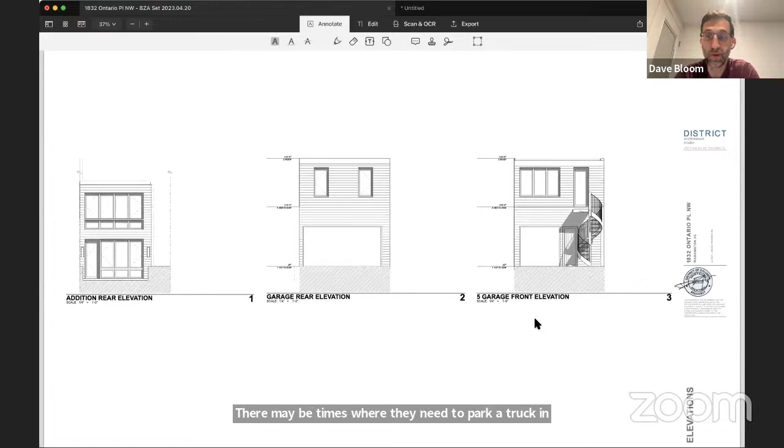I appreciate that. So one question I have, when you're doing construction, are you going to be closing down the alley to make way for construction equipment? I'm just trying to think of what sort of obstacles you might present to people navigating the alley during construction. Yeah, I don't imagine that we would close it down. There may be times where they need to park a truck in front of this property, but it would be nothing that would require it closed for days, or really probably even for hours.

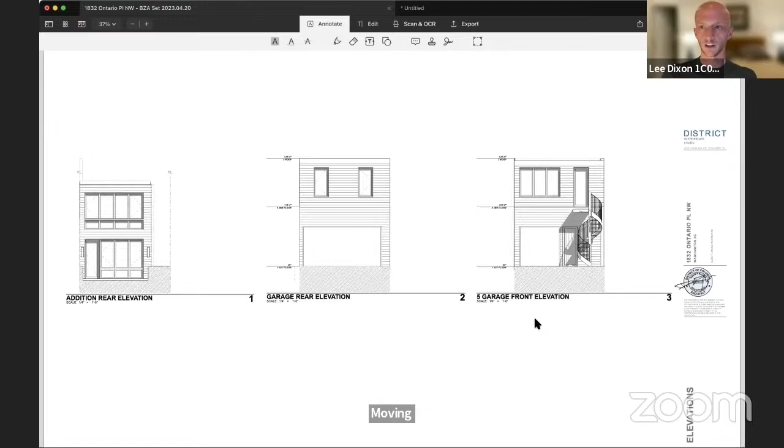And it's certainly, I would imagine, I'm not the contractor, but I've done enough of these projects to know something about it. If a truck's parked there, it's obviously something that can be moved pretty easily if someone needs it moved. Okay, I'm going to open up the floor to the other commissioners. Commissioner Falaschini. Thanks, this seems like a pretty simple, cut and dry case, especially with the support. The one question I do have is about the floor area ratio, the FAR, and how much that increases and up to what percentage with that addition of the second story above the garage.

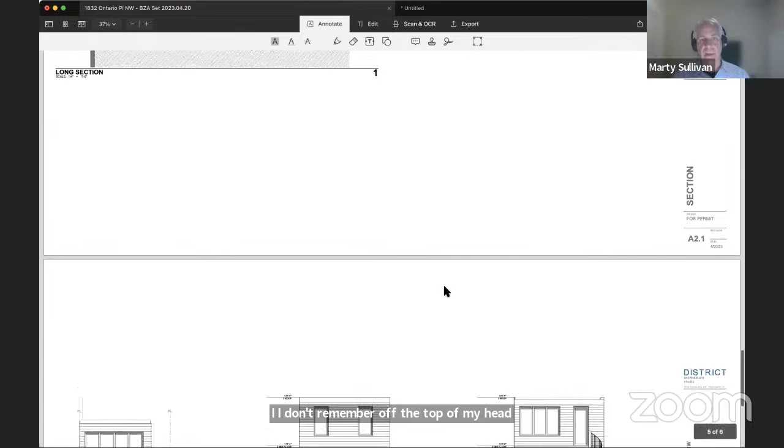Marty, do you know where we are with FAR? I don't remember off the top of my head. There's no FAR calculation in the RF zone. Yeah, it's just the lot occupancy and stories. Great, so but there's a building area requirement restriction for the accessory building itself, that it not be more than 450 square feet, and I think we're well under that, Dave. Right? Yeah, I think we're three-something maybe. My only potential concern, otherwise seems totally unfitting... fitting.

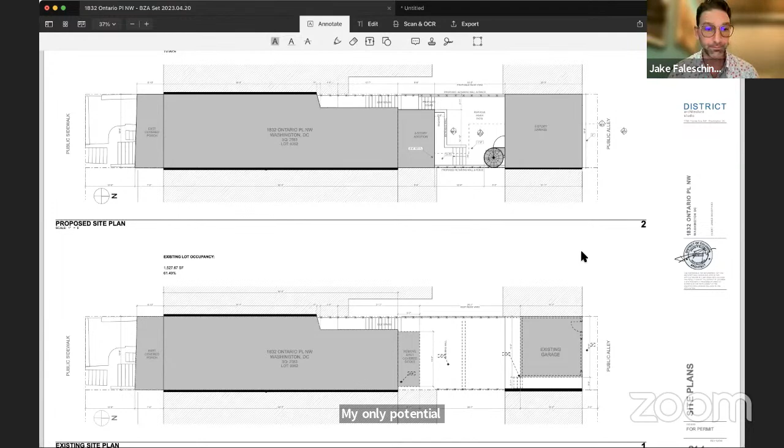Are there any other questions or comments from commissioners or the public regarding this project? It seems pretty straightforward, I feel like. Oh, Chris O.

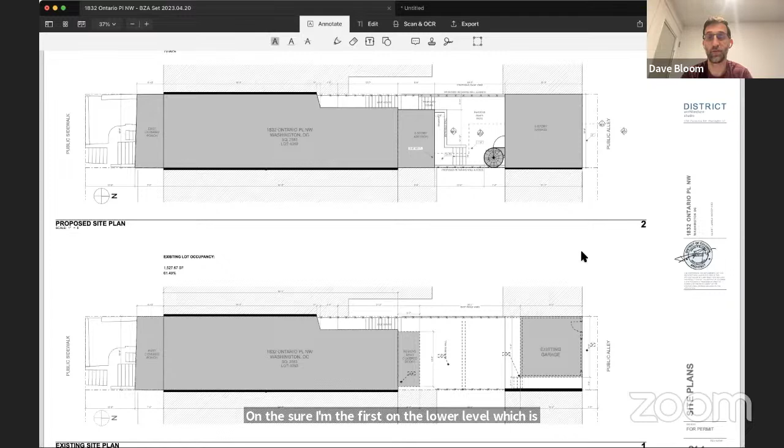Can you hear me? We can. Okay, just a quick question about use. I hear you calling it a garage, but it sounds like it could be an office, could be a bedroom, could be a garage. What is it? What's the use here? Sure, on the lower level, which is flush with the alley, it is a garage for car parking. The second level is sort of flexible space. He's talked about maybe using it for an office, maybe it's storage, maybe a guest bedroom, but there's no bathroom up there, so maybe that's not the most practical use for it.

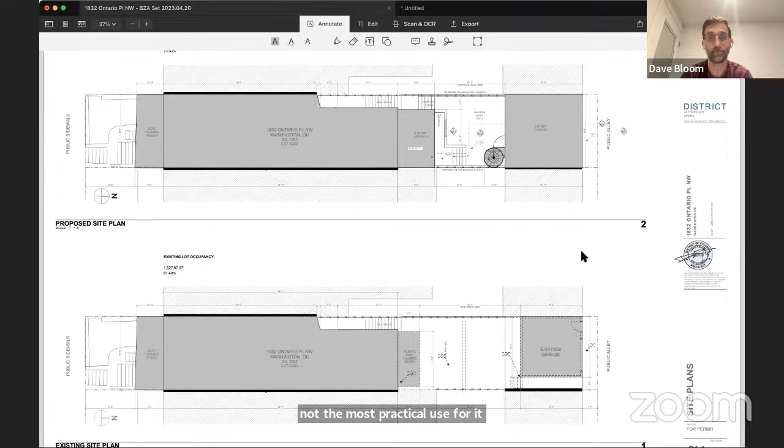Okay, was that the only question? Okay, well if there's no more questions, I motion to provide a letter of support for zoning relief for this project. All those in favor say aye. Aye, aye. All those against say nay. Abstentions. All right, the motion passes 5-0.

Great, this is a really good presentation. Very short, sweet, concise, easy to understand. Thank you so much for that. And thank you for your patience again, we really appreciate it. That's the way we... compared to the two previous ones, anything would look short. Probably. Very true. Thank you very much for your time. Appreciate it. All right, thanks, have a good night.

All right, so next up we have a discussion regarding 1617 U Street. We have some guest speakers to answer some questions. I'm going to call on Commissioner Stevens to open that up with an introduction and invite them to be panelists.

Okay, so first I would like to say, welcome Jason to your first ANC meeting. Jason is with DOB, he has been gracious enough to join us. I'm not quite sure he wants to be a panelist, but he is going to be on standby in case anyone has a question that he could answer. Also with us we have Daniel Lyons, who is with DMPED, and he has also very generously offered to be here to answer questions. But I'm going to lead this off because I did have a very helpful discussion with the Office of Planning the other day, and I would like to share that information with everyone, and I'll just kind of hit the highlights because I think everyone's getting a bit tired.

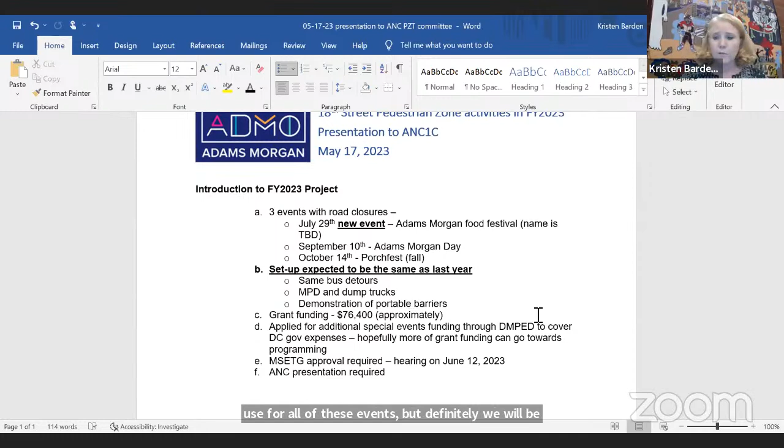So the grant funding, we think, is approximately $76,000. We've also applied for additional special events funding through DMPED to cover the DC government expenses, so hopefully more of the grant can go towards programming rather than paying for MPD and traffic control officers. As I mentioned, MSETG approval is required on June 12th, so I'm here today to tell you these are our plans as we hope to implement them. I'm happy to take any questions, and I also have a photo of the proposed barriers if you'd like to see what they look like.

Commissioner Faleschini: Thanks, Kristen, for your patience and for persevering through a long meeting. And congratulations, like others said.

A couple of questions. One, I know that last year there was some trouble coordinating with the organizers of Adams Morgan Day to make these events work in parallel with one another. Do you expect similar problems this year, or is it possible this will get past those barriers?

Last year, because we had to rely on a mayor's order, we had no choice about the dates at all. So this year, by going through MSETG, we're hopeful they will approve that September 10th Adams Morgan Day date. We're going early, and that's what we're hoping to accomplish. We've been coordinating with CC Hardy and Brian Kavanaugh, who are part of the Adams Morgan Community Alliance, to do that. So that's our hope.